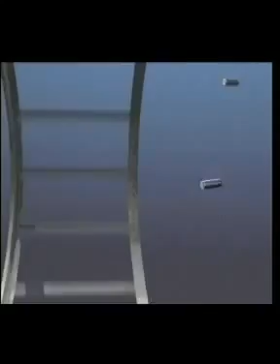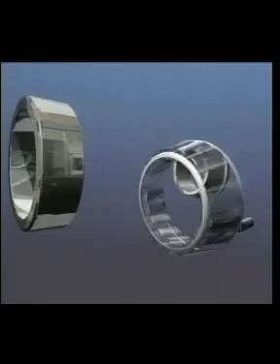A taper roller bearing consists of two separate parts: an inner ring complete with a set of tapered rollers secured by a pressed steel cage called the cone assembly, and an outer ring called the cup. The cup and cone are mounted separately, the cup in the housing and the cone on the shaft. Only when they're assembled together do they form a complete bearing.

Because taper roller bearings can only carry loads in one direction, they must be used in pairs, opposed to one another and adjusted together, then secured by a lock nut.

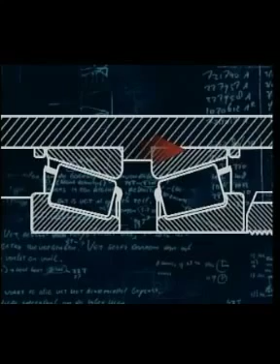Taper roller bearings are suitable for carrying combined radial and axial loads. Depending on the application, they can be assembled in back-to-back or face-to-face configurations. When mounting these bearings, they must always be assembled opposed to each other. They're particularly robust and are used where heavy loads and moderate speeds apply.

This film shows the mounting and dismounting of an industrial taper roller application, similar to that of a truck wheel. In this application, the cups are an interference fit in the housing and a clearance fit for the cone assemblies on the shaft, as this is a rotating outer ring application.

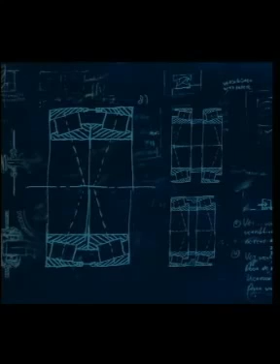This makes it easier to adjust the bearings. The taper roller bearings are commonly used in applications like industrial gearboxes, highway equipment and truck wheels.

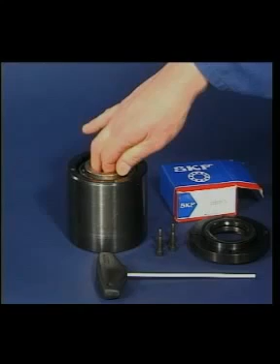For the mounting of taper roller bearings, first fit both the cups into the housing using the SKF fitting toolkit. One of the cone assemblies is then placed in its matching cup already in the housing, and the end cap is secured. If the bearings are grease lubricated, it should be done at this stage.

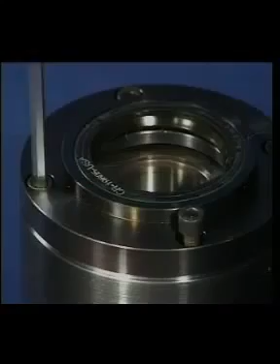The bearing should be kept in its protective package until the actual mounting takes place. The housing assembly is placed on the shaft, and whilst partially supported, fit the second cone assembly.

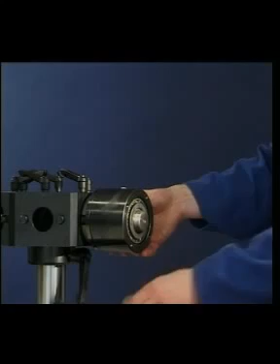Fit the retaining washers and hand tighten the lock nut. When adjusting taper roller bearings, it's important to rotate the bearings while hand tightening the nut. This will effectively seat the rollers onto the cone flange, ensuring correct adjustment is achieved.

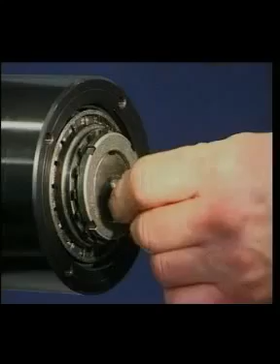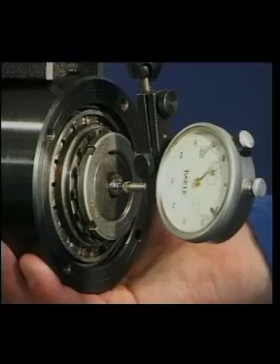This application is to be adjusted with a small amount of axial clearance. The most common way of measuring the axial clearance is with a dial indicator. It's necessary to rotate, then push and pull the assembly to determine the clearance value.

The lock nut is adjusted to achieve the required axial clearance. Depending on the application, preload or clearance values may be required. Refer to the machine manual for the specific adjustment value.

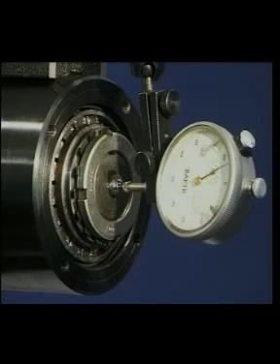Secure the lock nut with the lock washer tab. A final clearance check is required before greasing and fitting the remaining end cap. Remember, the degree of clearance is set on assembly and not at the manufacturing stage of the bearing.

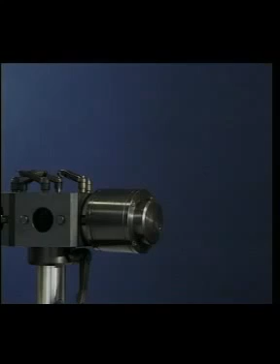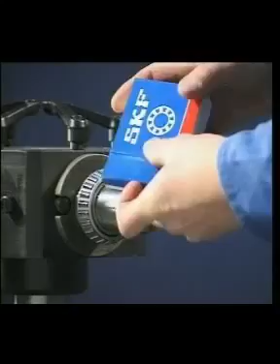Another type of taper roller setup is when a pair of complete bearings are carefully measured and appropriate spacers made to give the required clearance or preload between them. This is usually done at the manufacturing stage. It's essential that the spacers and bearings are kept together as a unit.

Unlike the individual taper roller bearing, the cup and cone assemblies are matched sets and must not be mixed. In this application, the inner rings and spacer are clamped tight against the shoulder on the shaft. When mounting taper roller bearings, make sure they're always assembled opposed to each other. The wrong configuration can cause severe damage to the equipment.

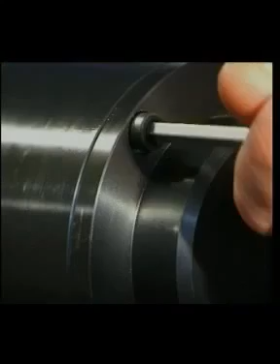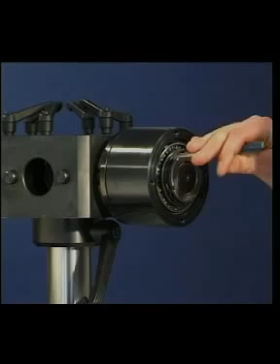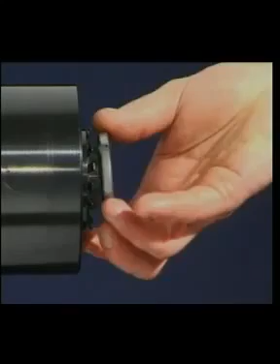To dismount taper roller bearings, use the fitting procedure in reverse. After removing the end cap, drive back the lock washer tab and unscrew the lock nut. The taper roller assembly can now easily be removed from the shaft.

Taper roller bearings can be adjusted with either axial clearance or preload. When tightening the lock nut, the axial clearance in the application is reduced. Continued tightening of the lock nut at this stage will preload the application.

To achieve the correct torque measurement, refer to the machine manual. Heavy preload will reduce bearing life, and too much clearance will cause excessive shaft movement and damage to the application.